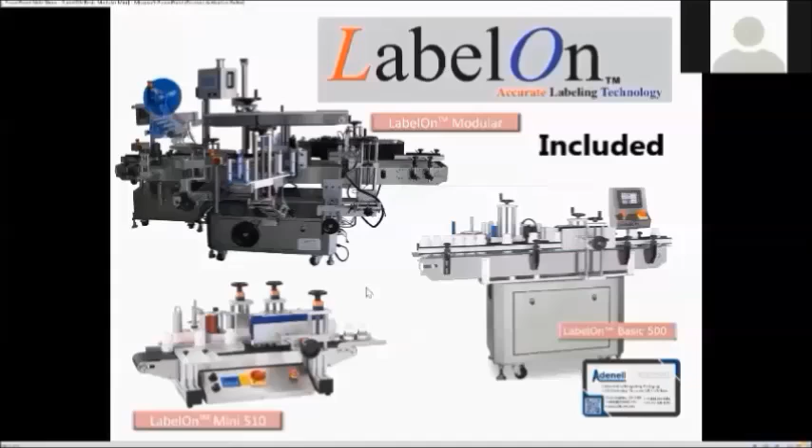More than just a machine and a manual, a unique and important resource we provide is an online gallery. All our LabelOn Basic and Modular clients receive their own custom gallery, as well as our LabelOn Mini clients who choose the extended support package.

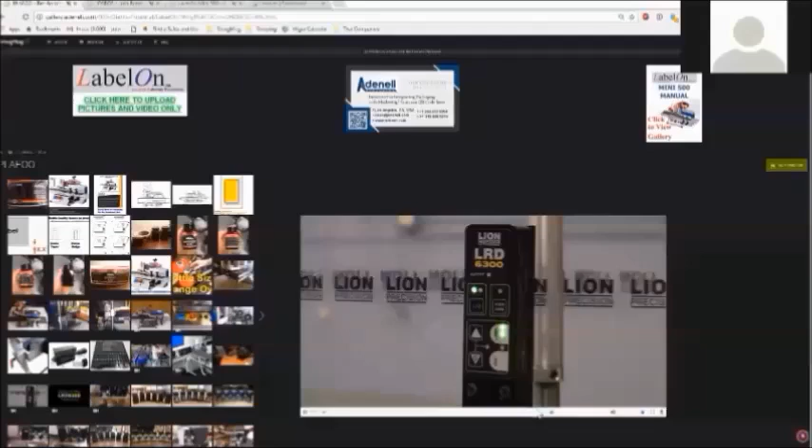You'll be provided a link that takes you to your gallery where you enter your password. Inside, you can easily navigate between pictures and videos of your own products, the equipment, and other resources such as manuals or videos for your machine and its sensors. You can also upload items in the gallery yourself by clicking the top left corner.

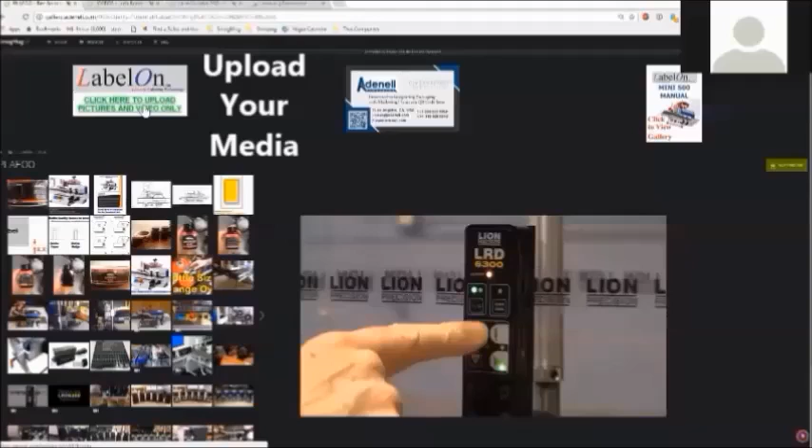The gallery usually starts with an overview of the machine features. One of the most common concerns is how quick and easy it is to change from one bottle or label to another. This video for the LabelOn Mini highlights the entire process, from start to finish, in less than 5 minutes.

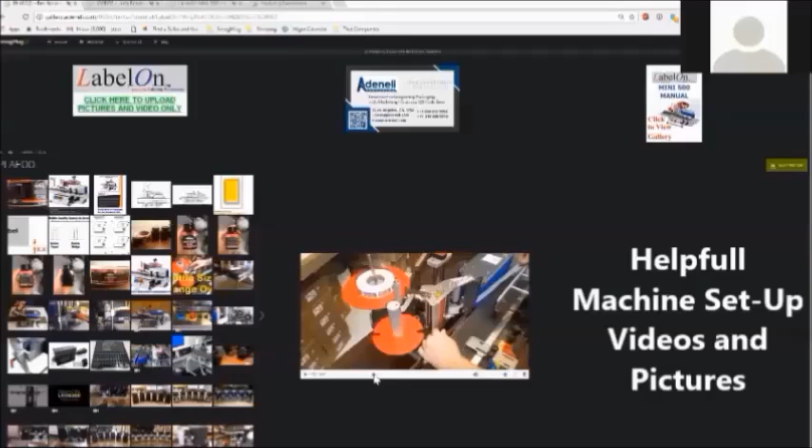Next, we go through and assess all of your products, where we look for potential issues with your containers and your labels, making sure the labels are correctly sized and oriented on the roll. And of course, we listen to what your needs are for your machine. For example, how we can integrate a hot foil coder or work with measures to align or stabilize your products during labeling.

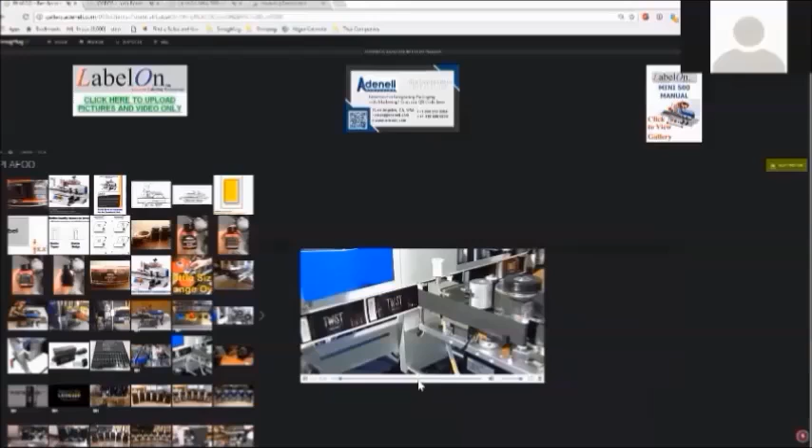The goal is to catch any complications early. We identify if there are poorly sized labels or bottle shape issues, for example bottle tapers or complex contours. When your machine arrives, you really want to avoid chasing your tail.

The key aim of the gallery is to give you the confidence that the machine will meet your stated goals before the machine is shipped to you.

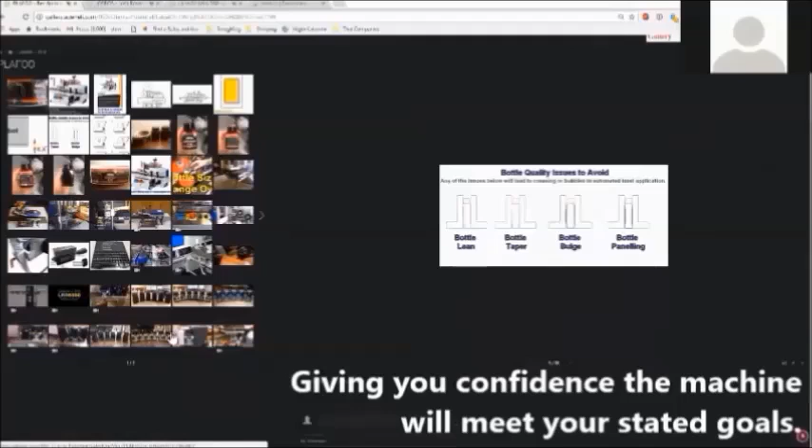Once we have settled on a design and the machine is underway, you can follow along during the machine build phase and monitor the process.

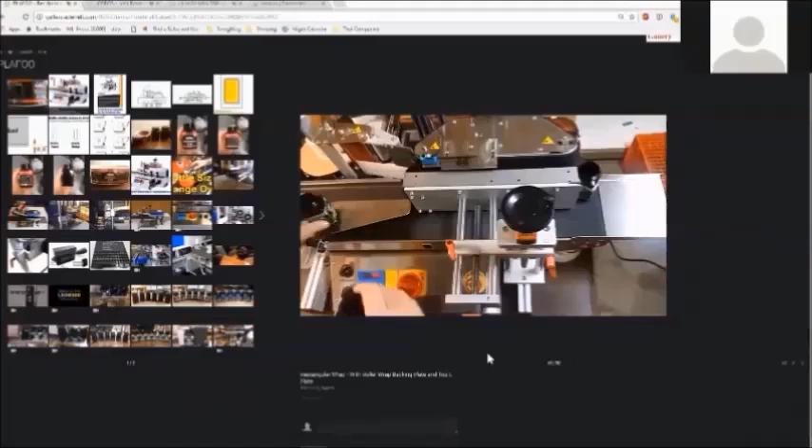Before delivering your machine, you'll review and approve the factory acceptance tests of your samples. Here we see the same bottle run through the machine 2 times. This test highlights the tolerance and accuracy. It shows you what to expect.

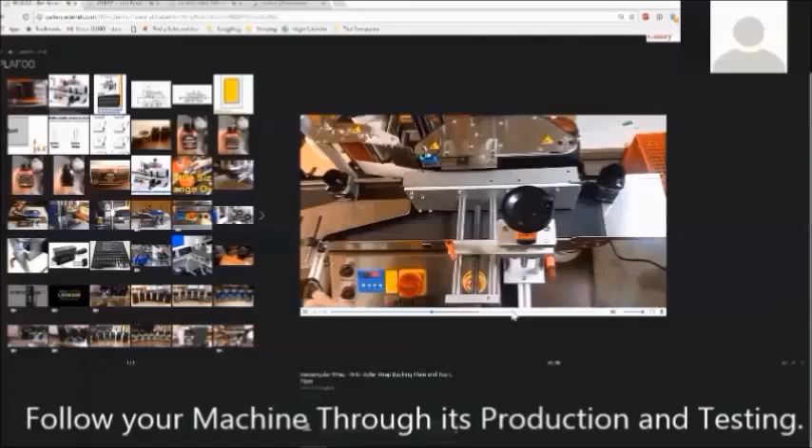This takes all of the guesswork out of the equation before your machine arrives. You will know exactly what you're getting, how the machine performs, and the accuracy you can expect in your operations.

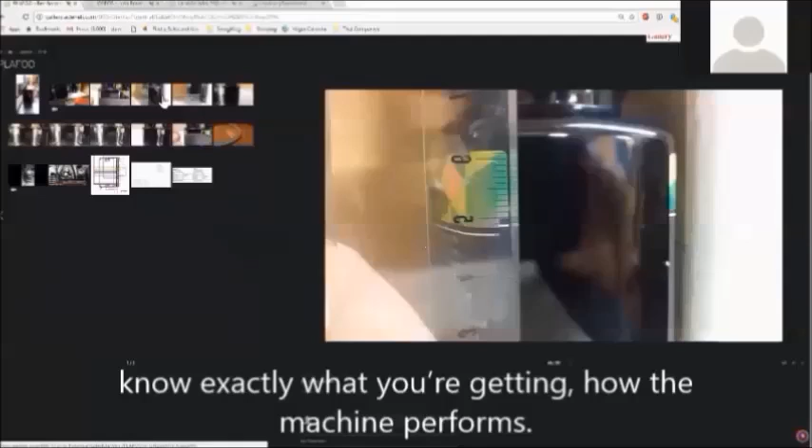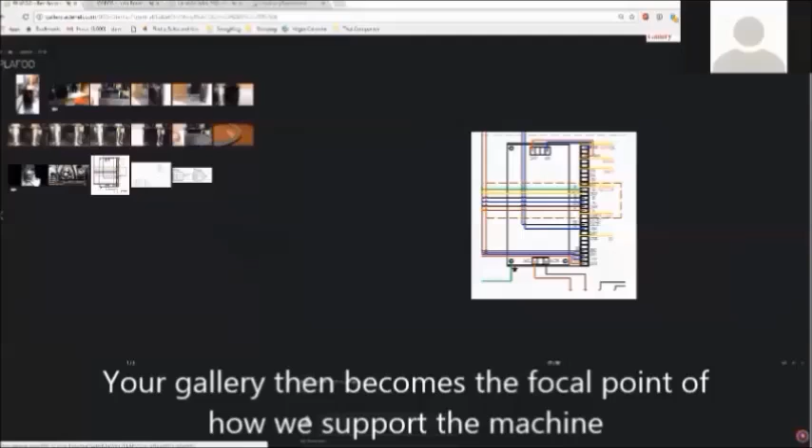Finally, the gallery becomes the focal point of how we support the machine. The gallery, combined with our video call support, makes owning our machinery both a pleasure and a wise choice. When our clients call us needing assistance, we can both be on the same page, quickly identifying what the client needs.

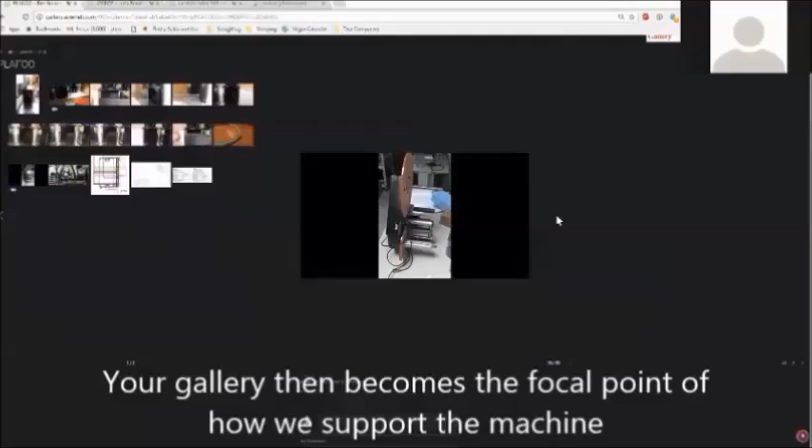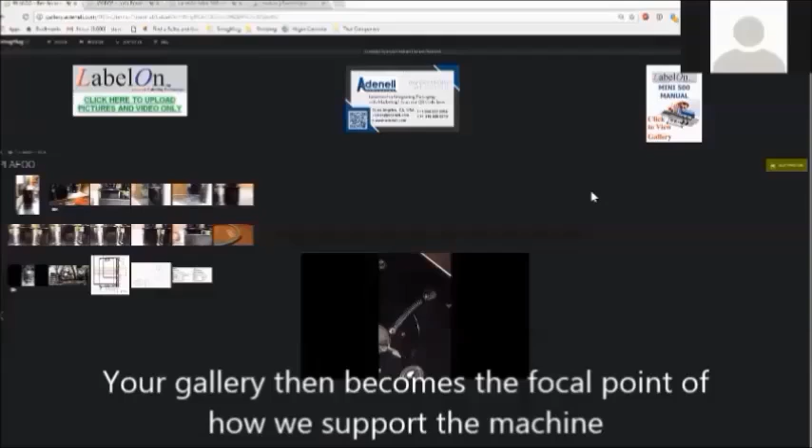Without something getting lost in translation over the phone, by uploading pictures and videos of any issues you come across, you have a permanent history of how to identify and fix a problem. Any time or place that you have an internet connection, you have access to your gallery as a convenience, and can look it up from most smartphones, tablets, and computers.

A copy of the manual is always available for download in PDF format, but you can have it as an online version, which you can view from your gallery. The page numbers at the bottom make it easy to identify sections during discussions over the phone.

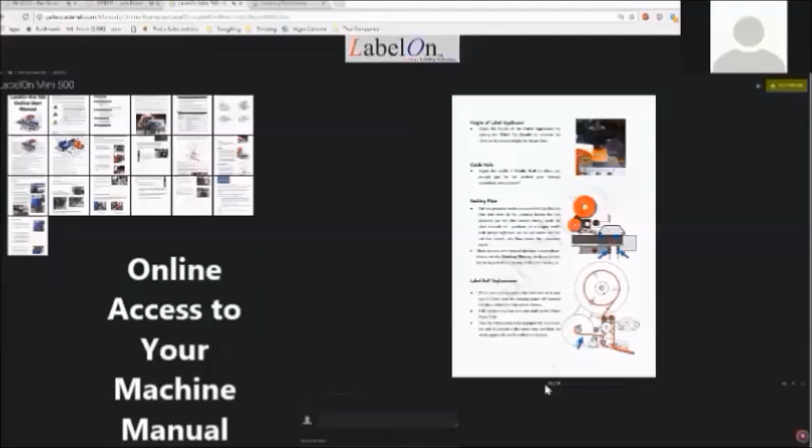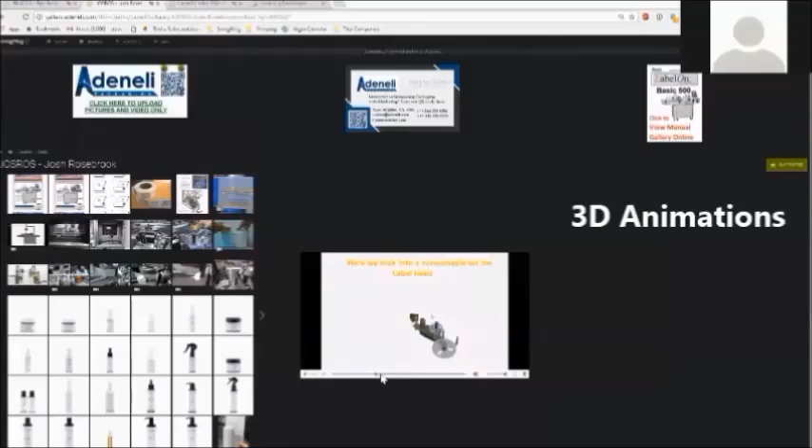With our LabelOn Modular and Basic series, we have 3D models that allow us to host online screen sharing sessions. We can also produce small 3D animations for your gallery. Why rely on an alternative's junior service technician to arrive if or when they are available?

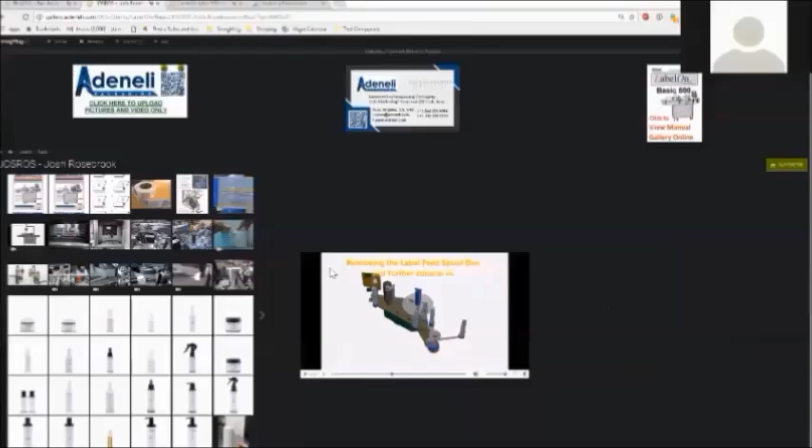Your LabelOn gallery tools, in combination with our phone and video support, makes our support package a far more attractive and effective option to work with, no matter where you are, in or outside of the country.

The value of our online gallery is hard to measure. However, you can see that it takes the supply of your labeling machine to a much higher level, much higher than simply buying a machine with a basic manual.